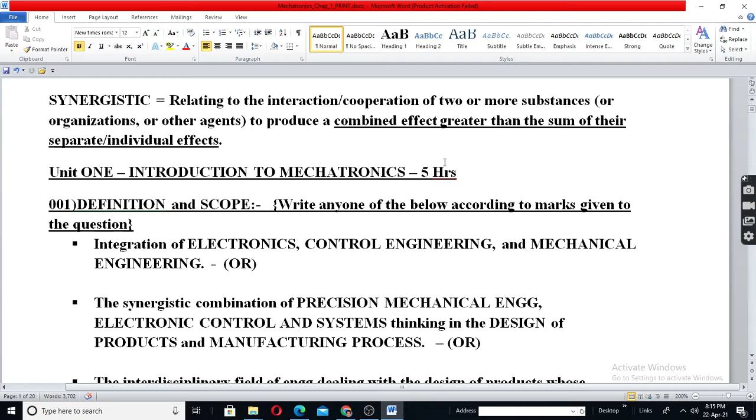But if you have all these four things in a single device, you get an enjoyment of not just 20, but 50 or 100 or even more, because cost is very much reduced, space is reduced, time, energy, everything is reduced. So that is the benefit of a mechatronic system. The smartphone is an excellent example of a mechatronic system.

Now in mechatronic systems you have different levels. The simplest one is the integration of an electrical and mechanical device. So mechatronics at the basic level is electrical plus mechanical. For example, a relay operated by a CT. A relay has electrical and mechanical parts; there is an armature which moves. To the relay, a CT may be given as the signal for the actuation of the relay. So the relay is an actuator and the CT is a sensor. So in the basic system, you have only two devices, actuator and sensor. That is the first level or primary level of mechatronics.

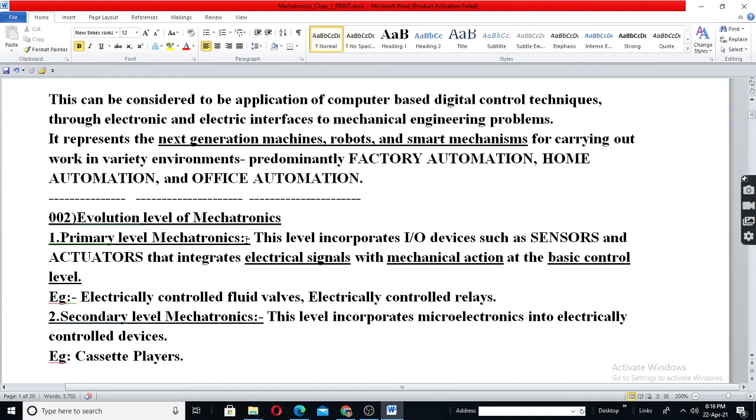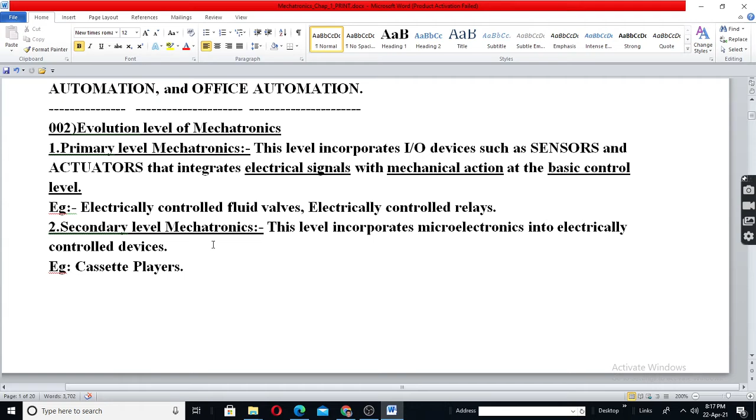Next you have the secondary level, or second level, of mechatronics. This adds microelectronics to electrically controlled devices. Already you have mechanical and electrical; now electronics is also introduced. This is called the second level. Example: audio and video cassette players. Some of you may know audio or video cassettes played in an audio tape recorder or video cassette player. So you have mechanical, electrical as well as some electronics. This is the second level of mechatronic systems.

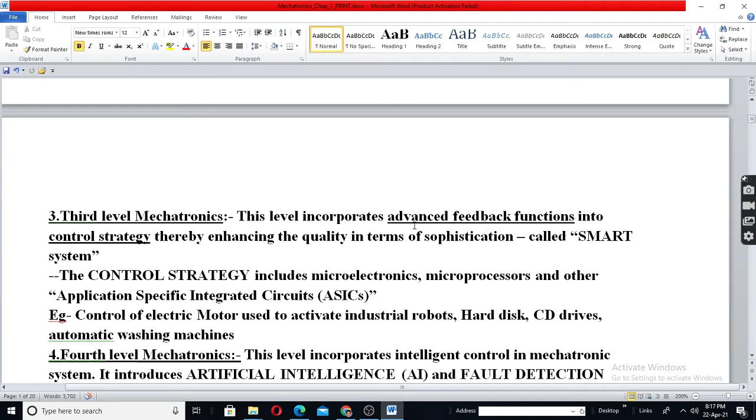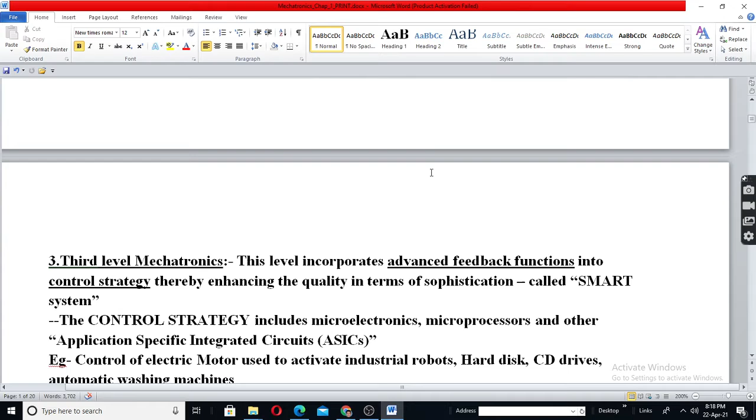Next, the third level of mechatronics. In the third level, advanced feedback functions and control techniques are used. For example, in a smartphone there is a touch screen. So there is advanced feedback; we can give feedback just by touching the screen. And the control technique is now not simple ICs or transistors, diodes, etc., which are used in cassette players, but sophisticated electronics which use microprocessors.

Okay, and a specific type is also called an application specific integrated circuit, or application specific IC. In automatic control, automatic washing machines or automatic devices, some ICs help in making the work compact, easy, and also cheap. ICs which are specifically designed for washing machines, say, are hence called application specific ICs.

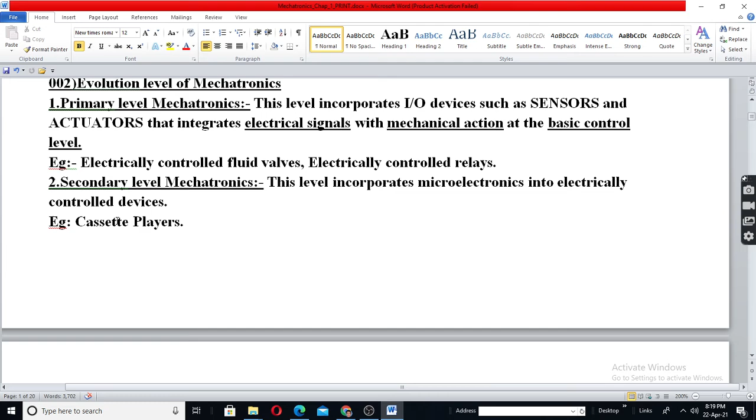For example, say you have a video cassette or audio cassette. It is just a mechanical device. There is no electronics in a cassette, but hard disks and CD drives are also memory devices like a cassette. But here you have microelectronics introduced into the hard disk. So these are the third level, a higher level of mechatronics system.

Next we have the fourth level, that is artificial intelligence. So here, for example, you have computer guided vehicles. Some cars are already available, but the government has to give license or permission to use them. Suppose an accident happens, who should be held responsible? Should the owner be held responsible, or the company, or the government?

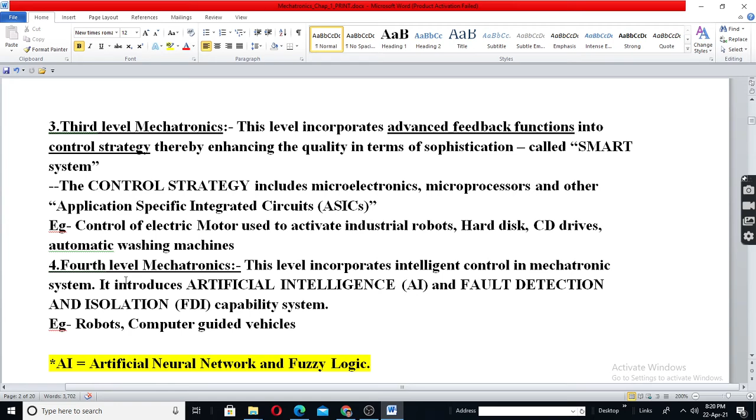Hence, in many countries, the government has not given permission to use computer guided vehicles. So without a driver, you can use that vehicle. So this is called the fourth level mechatronics, or most advanced. The advantage is it is cost effective. No need of a driver for the car, say. Okay, so cost will be less.

Take the example of a car in which a home is also made. For poor people, a home built within a car may be good because it is cost effective for him. If you have a separate house, separate toilet, separate kitchen, separate car shed, separate car, then the total cost may be 40 to 50 lakhs. But suppose a car is only 5 lakhs, and if you build a home within the car, it may cost up to 10 lakhs. So instead of 40 to 50 lakhs, 10 lakhs gets your work completed.

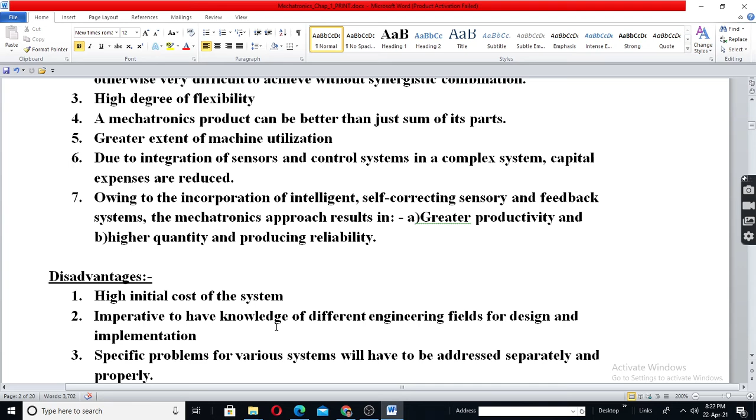It becomes very easy for you to move from kitchen to toilet, toilet to kitchen, bathroom, etc., because everything is very close to you. That is the advantage. Cost is also less, but initial cost will be high. Initially, nobody will like to have a home inside the car, so initial cost may be high till mass production happens. Initially, smartphones and computers were costly. Later, they became cheap. And the flexibility will be lesser in case of a mechatronic system.

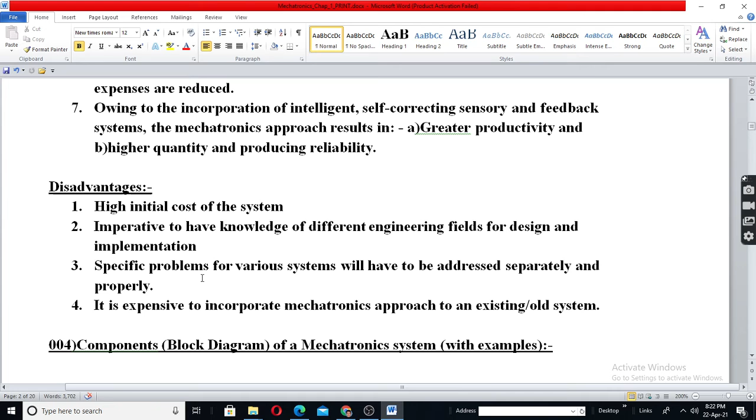In a mechatronic system, say you have a home in a car, or an IC used specifically for a washing machine, that IC cannot be used for another machine. But there are some general purpose ICs which can be used for many machines. So the flexibility will be lesser in a mechatronic system. If you have everything in a car, you will have lesser flexibility. Only one or two persons can use it, and you can use the car only for sleeping. You cannot use it for other purposes,

say for a function or meeting, because only one or two persons can be accommodated in such a car used as a home. You cannot have a family house in a car. But for poor people who live single, in many countries they make the car itself their home to save money, because they don't have land to purchase their own house or money to pay rent. In the US it is famous, because there a car is cheaper, since rent is costly and homes are also costly. So for a poor person, such a system will be better.

But flexibility will be less in case of a mechatronic system. You can use it only for a washing machine, or similarly a car home can be used only for one or two persons and only for sleeping, drinking, sitting, and that's all. You cannot use it for a meeting. You cannot use it for a prayer hall. Many things cannot be done there. So these advantages and disadvantages are there.

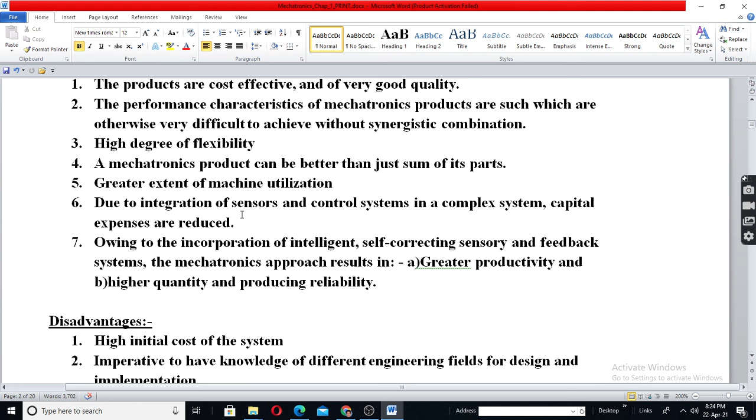And in a mechatronic system, the person should have higher knowledge to operate it. Say a smartphone: an illiterate person cannot enjoy all the facilities given by the smartphone. To operate it and use it effectively, he needs higher knowledge. For other advantages and disadvantages, you can see the notes.